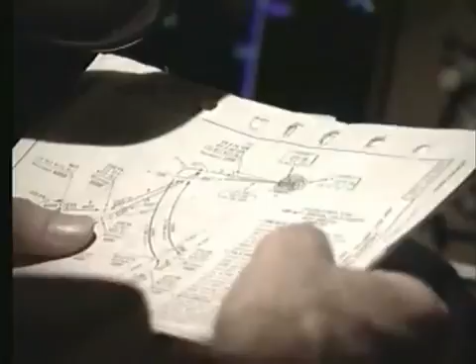As a result, they were cautious and made a thorough preparation and briefing. Their planned approach was going to take them around the DME arc to join finals for runway 08. It was a dark, moonless night and the controller at Apia was reporting scattered cloud over the airfield. As an extra precaution, they briefed for the VOR DME approach to runway 08 in case the ILS was not functioning. In a moment, we'll let the crew help tell you the story as they made their approach for runway 08.

The glide slope capture happened almost immediately after the approach mode was selected. The captain had the aircraft in vertical speed mode to slow down and was concerned that the aircraft seemed to accelerate as it pitched down with the glide slope capture. As we came around the arc, everything was fine. But suddenly, at glide slope intercept, everything became rushed. The aircraft pitched down, but now the aircraft was a lot faster than you should be as you commenced the descent for the ILS. But the ILS indications were all correct, so the captain concentrated on managing the energy problem.

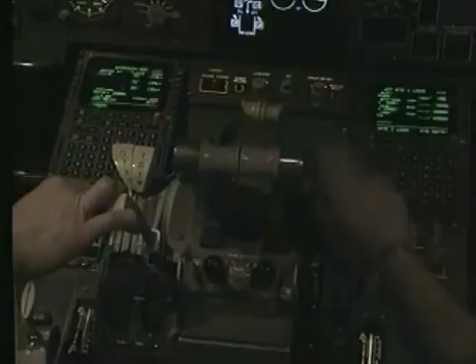I reconciled it by saying tailwind, heavy weight. There were no flags, no warnings of any sort to indicate that there was anything other than an autopilot capture of a valid localizer and a valid glide slope. The first officer did not remember talking to Apia Tower about this time because he was focused on assisting the captain with the management of the aircraft energy problem. We were getting preoccupied with managing the aeroplane and slowing down and configuring.

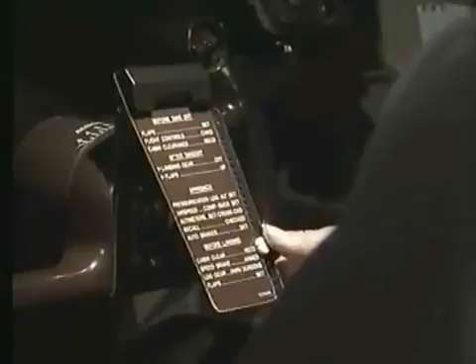At 1,000 feet, the crew had completed the landing checklist. Each started to think again about the unease they had felt when the aircraft had captured the glide slope so quickly. Why were we rushing? Why was the aeroplane going down so quick? Why were we needing to use speed brake? Why were we needing to use the gear? I was heads down managing the aircraft all the way through till the landing checklist was complete.

With the aircraft now set up for landing, they started to revisit their doubts. They were looking for something to confirm that the on-slope glide slope indications were, in fact, correct. I looked up to clarify in my own mind where we were. Something in my mind said things were not right.

All 3 pilots looked up through the forward windscreens, expecting to now see the runway lights in front of them. The captain reported seeing a mishmash of lights and thought that scattered cloud, previously reported by Apia Tower, might be partially obscuring them. The other pilots could not see the runway lights either. Well, when I looked out the windscreen I couldn't see the airfield, and I expected to. I remember looking up through the windscreen and all I could remember seeing is 2 dim red lights. I thought, oh, that's interesting.

Where's the airport? It didn't make any sense to me, so I came back inside and saw that the glide slope and the localizer are both still centred. There are no warning flags, and the 3 autopilots are still engaged. The first officer looked out of his side window and was surprised to see that the lights from the village on the adjacent island were so close.

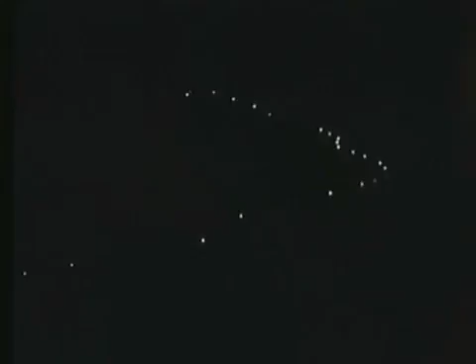He voiced his surprise. Well, shit, those lights are close. At the same time, the captain was doing a DME cross-check, but was unable to make the answer tie up with the aircraft altitude. He decided that there was something seriously wrong with the ILS instrumentation. The third pilot also checked the DME against the altitude.

I did the first DME check, it didn't make sense. What had I done wrong? And suddenly it all clicked that my DME checks were saying we weren't where we were supposed to be, and almost instantaneously all 3 of us said, go around, go around. Go around, go around. The autopilots were disconnected and a missed approach was conducted to a safe altitude using only

the standby instruments. The captain chose to fly to a safe position to assess what should be done next. He had a feeling the aircraft had deceived him and he needed to re-establish his trust in the instrumentation before

returning for another approach. Once we'd levelled off at 4,000 feet, I was very keen for the captain to put the autopilot in, and I prompted him. I was keen for him to offload himself, and in doing so offload all of us a bit so we could ascertain exactly what we were going to do and use the autopilot to help join the arc and fly a second approach.

The first officer called Apia Tower on the radio. We've had a false glide slope capture. Restoring their confidence in the aircraft systems was not easy, and all 3 pilots discussed their situation carefully. Their discussion led them to suspect that the glide slope for runway 08 was giving false information and could not be trusted. They then planned and executed a second approach, using the localizer and ignoring the on-glide path indication.

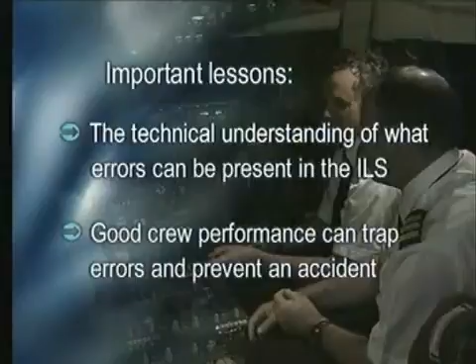The subsequent investigation revealed some important lessons in 2 main areas. The first lesson is the technical understanding of what errors can be present in the ILS. The second lesson is in how good crew performance can trap those errors and prevent an accident. Let's look first at the technical aspects of the investigation, and specifically the ILS ground system.

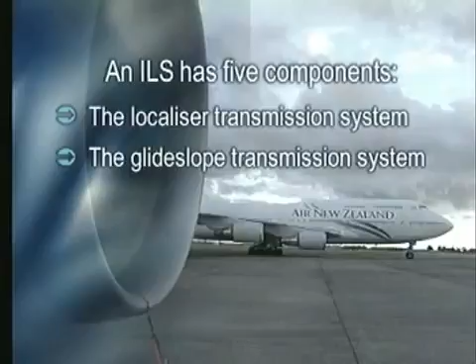A basic ILS system provides horizontal and vertical guidance information to an aircraft. An ILS has 5 distinct components. These are the localizer transmission system, the glide slope transmission system, co-sited distance information from a DME or a marker system, a second standby transmitter, and a remote control and indicator system.

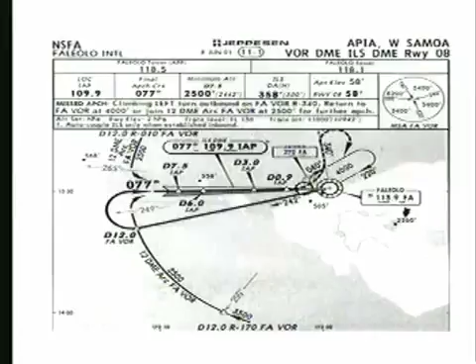The Morse code identifier signal, or ident, is carried on the localizer carrier signal only. The ramifications of this are not widely appreciated. An audible and valid ident is, therefore, only guaranteeing you that the localizer carrier signal is transmitting. It does not ensure that the glide slope is transmitting. If some components of the whole ILS system are not functioning, it is recommended that they should be switched off.

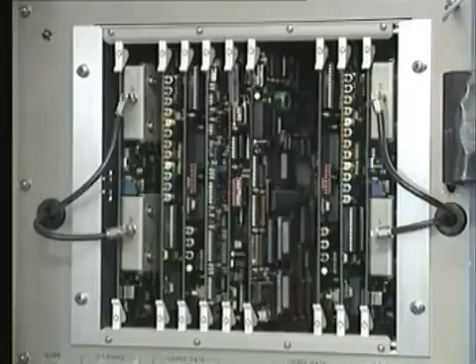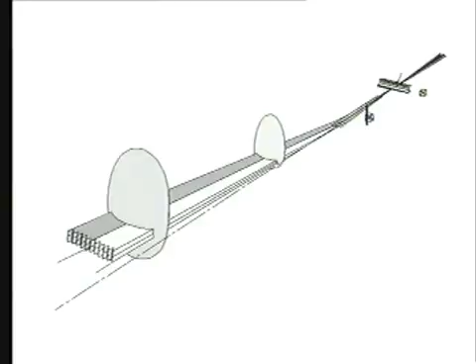2 separate transmitters generate the localizer and glide slope signals. Each transmitter receives signals from a pair of amplifiers. Historically, we've been led to understand that both the electronic localizer and glide slope signals form narrow, tightly focused beams which the aircraft receiver sensed. The actual signal pattern is, as you will see, rather different.

The 2 glide slope amplifiers provide signals to the glide slope transmitter. The transmitter then routes the signals to 2 independent aerials. The 2 aerials that create the total glide path signal are located on a tower near the runway and abeam the touchdown point.

The lower aerial radiates the carrier wave. This carrier is formed by a UHF signal and is modulated or adjusted with 2 other frequencies of 90 Hz and 150 Hz. The resulting signal contains equal amplitude 90 and 150 Hz modulations. This carrier wave on its own does not provide any glide path guidance.

The upper aerial radiates 90 Hz and 150 Hz modulations only. These signals are transmitted in a specific phase relationship, with the 90 Hz and 150 Hz signals being transmitted by the lower aerial. As a result, a complex interference pattern is formed, effectively creating upper and lower side lobes as shown in the diagram. The null between the 90 and 150 Hz side lobes define the glide slope.

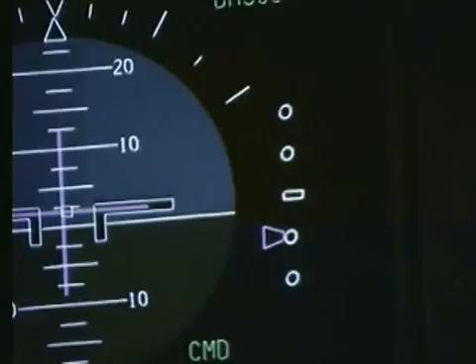These patterns are designed so that if the aircraft is below the desired 3-degree glide path, it will sense a predominance of 150 Hz. If it is on the desired glide slope, it will sense the null between the 90 and 150 Hz signals, so that the flight instruments will show on slope. If it is above the desired 3-degree glide path, it will sense a predominance of 90 Hz. This is the normal operation of the glide slope transmitter.

Let's look at the abnormal ILS glide slope transmission that occurred on the night. The glide slope side lobe amplifier was not operating, so the aircraft only received the glide slope carrier wave. Because the carrier signal has equal amplitude 90 and 150 Hz modulations, this signal was electronically interpreted as being on glide slope. But the ILS system is supposed to protect against this type of malfunction. So what are the measures that should prevent a faulty glide slope transmission?

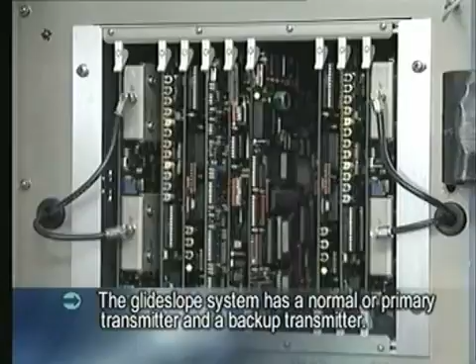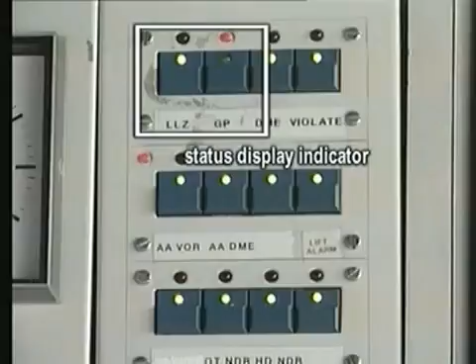The glide slope system has a normal or primary transmitter and a backup transmitter. A sensor on the radiation field monitors the signal integrity. And there is also a status indicator and alarm in the tower. For a Category 1 ILS, ICAO rules specify that an out-of-tolerance transmission shall not exceed 6 seconds under any circumstance. If the primary transmitter develops a fault, the system should automatically transfer to the backup transmitter. If the changeover does not occur, or the backup transmitter is also faulty, the system is automatically shut down and the alarm in the tower is sounded.

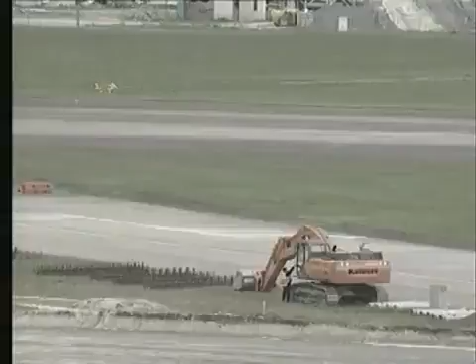However, the runway at Apia was being extended and the cable was cut between most of the navigation aids and the status display in the tower. This resulted in the NOTAM stating that various navigation aids, including the ILS, were unmonitored.

But unfortunately there's more. For maintenance purposes, parts of the ILS system can be shut down in a bypass mode to facilitate calibration. On that night in July 2000, the glide slope transmitter with the inoperative side lobe amplifier was left switched to the maintenance mode via a bypass switch so that the system could not transfer automatically to the standby transmitter. As a result, NZ60 only ever received the carrier wave transmission for the glide slope, and so the aircraft always sensed that it was on slope. As the carrier signal was being received, the aircraft instrument glide slope warning flags consequently were removed from view.

Now let's consider what threats exist and what our strategy should be to deal with these threats. There are many possible ILS problems, but we can categorise them into 4 groups: the false glide slope, the false localizer, the erroneous glide slope, and the erroneous localizer. The false glide slope and the false localizer are byproducts of the normal ILS transmission.

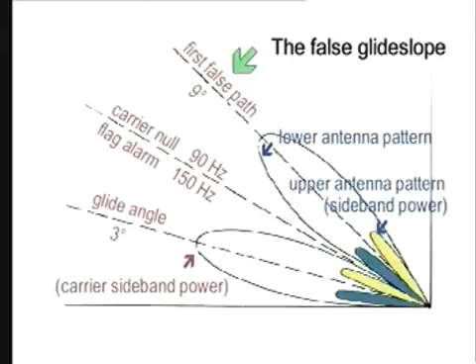For example, the glide slope signal is transmitted with additional lobes above the primary 3-degree lobe. The first one has a 9-degree glide path. If this false glide slope was captured, you would have no flags, show on slope, and have a normal ident, but you would need an extreme rate of descent. The best strategy to detect a false glide slope capture is to intercept the glide slope at the final approach fix to enable a cross-check of altitude against position.

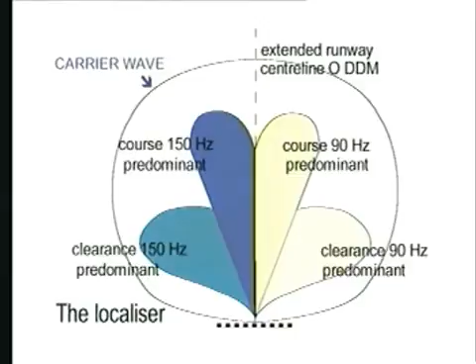A false localizer is caused by a similar phenomena to the false glide slope, but in a lateral path. Remember, these false paths exist as a normal byproduct of correct and valid ILS transmissions. The erroneous glide slope will show that you are on slope regardless of your approach slope or where you intercepted it. You will have no flags, have an on-slope indication and a normal ident. In addition, your sink rate could look quite reasonable.

Even a GPWS would not prevent an accident in this case. The alerts are inhibited if the rate of closure with the ground is within design parameters, and especially if the aircraft is configured for landing, even though the touchdown point might be several kilometres from the runway. However, aircraft fitted with a terrain awareness warning system, for example EGPWS, would receive an alert in this situation. There is one more complication.

Many modern aircraft use flight management computers for lateral and vertical guidance. Once they have been programmed to intercept an ILS, they will fly to their estimated intercept point and execute a pre-programmed pitch-down manoeuvre in the order of 0.05 of a G. This will establish a rate of descent that has no bearing on the actual glide path.

Once this pitch-down has been completed, the aircraft's flight control computers will react to any sensed glide slope deviation. If the glide slope signal is erroneous and indicates on slope, no corrections will be applied to the descent angle. Add this situation to the mindset of pilots that a correctly indicating ILS is valid and accurate, when combined with a distance altitude check at the glide slope capture, and you have a recipe for disaster. The single distance altitude check does not guarantee the subsequent descent path.

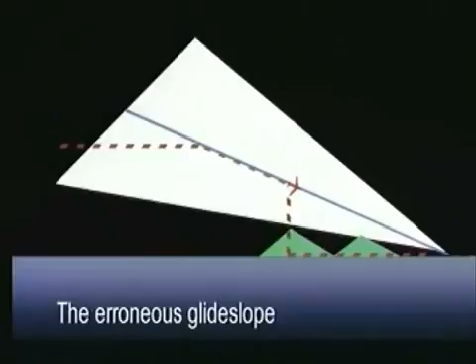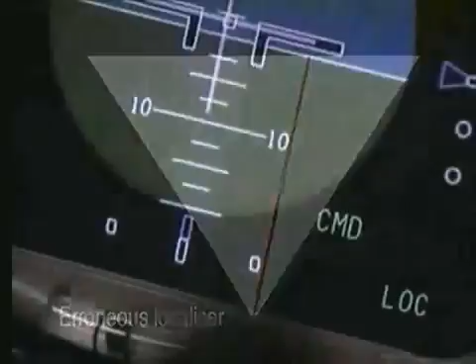Similarly, a single altitude check crossing the outer marker does not guarantee the glide slope is correct. The best strategy to employ is to periodically cross-check the aircraft altitude against distance during the descent. The localizer signal is formed electronically in a similar way to the glide slope signal. The erroneous localizer presents the same problem but in the lateral path as the erroneous glide slope. Again, you would have an on-centre indication, no flags and a normal ident, but the aircraft would not be following the correct path because it would not be getting any lateral deviation information.

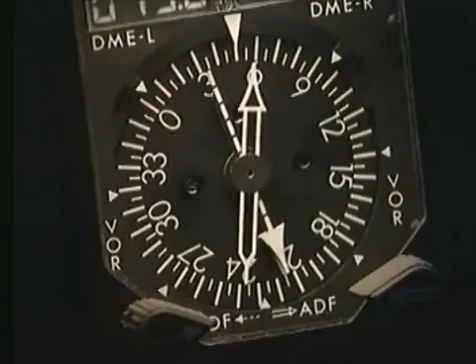The best strategy for this fault is to cross-check the ADF or VOR pointers. They will show any tracking discrepancy if they are selected to the outer marker or a nav aid selected at the field. The investigation also looked at human factors issues, and specifically the crucial strategies which enabled the NZ60 crew to prevent this incident from becoming an accident. These were team building, preparation, vigilance, and trust.

Preparation for this flight was excellent. The crew arrived early to flight planning. They hadn't operated together before, but they reported that a good feeling of teamwork quickly developed due to the relaxed atmosphere which allowed them all to work effectively. The crew's thorough discussions regarding the unmonitored state of the VOR, ILS DME and ILS glide path, and the absence of standby power for the ILS glide path also involved the flight dispatcher. On the way to the aircraft, one of the first officers bought coffee for the flight crew and the ISD. All these team-building elements meant that this crew was functioning very well long before the event at Apia.

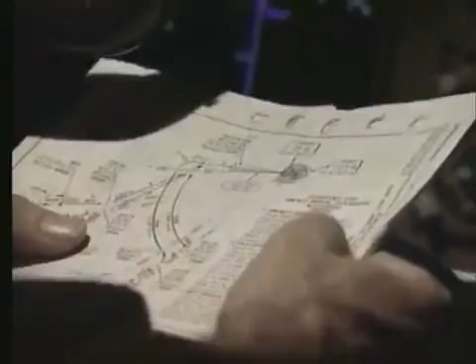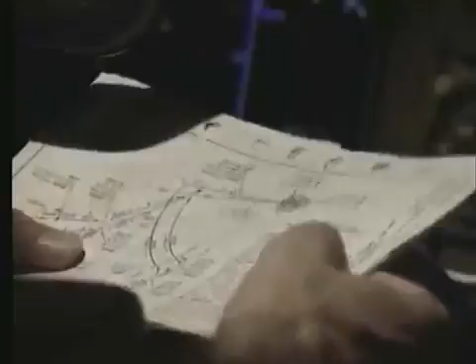Vigilance is what saved this flight. The pilots planned their descent and approach carefully, and the approach briefing was very thorough. During the initial stage of the approach, they confirmed the planned FMC descent profile was being flown on the DME arc by using the 1 in 60 rule. Because it was NOTAM'd unmonitored, the third pilot continuously monitored the ILS ident for any unseen eventualities. They also pre-briefed for the alternative VOR DME approach. The crew were watching and waiting, but when the clues arrived, they needed to decide which information was correct before deciding what course of action was appropriate.

Probably the best qualified to comment on this process is the head investigator into this event, Mr. Dave Stobie. Early on in the investigation, it was obvious that this crew were cautious, diligent and well prepared for the approach. They were aware that they needed to cross-check their various pieces of information, but they had a normal mindset for pilots conducting an ILS. Pilots tend to trust the most precise information. For example, they trust a VOR more than an NDB. They also trust an ILS more than any other approach aid because it allows high precision approaches.

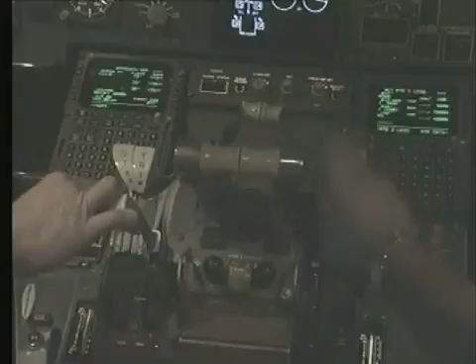So when things didn't feel quite right during the approach, they naturally accepted the most precise information they had, which was the ILS, especially in the absence of any warning flags. That mindset was difficult to break. The combination of a high workload managing the aircraft energy and the trust in the ILS system that they had all been conditioned to have made it difficult for them to perceive the glide path error. When the captain looked up and didn't see the runway lights, he made the mental picture fit by assuming there was weather in front of him.

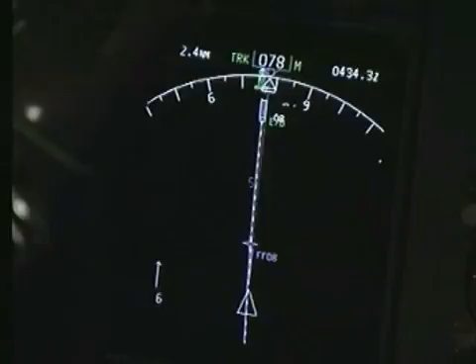When they saw a descent of just over 1,000 feet per minute, the crew again made the mental picture fit by assuming the tailwind and heavy weight were the cause of the higher rate of descent. They were presented with normal centerline and glide slope indications on all their instruments. The autopilot had accepted the localizer and glide path guidance signals. There were no immediate clues available to warn them that the information being portrayed on the instruments was, in fact, wrong.

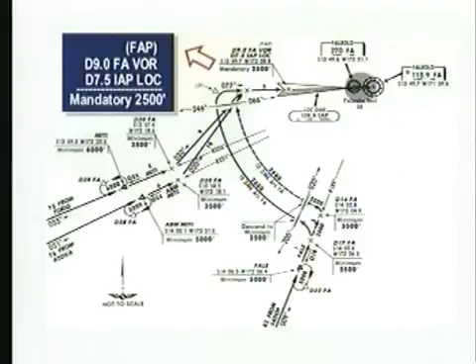The autopilots interrogated all data and found no anomalies with the status of the ILS information and therefore went to Land 3 auto land mode. The Faleolo VOR DME was the only DME not subject to a NOTAM. With the crew using this DME, the conflict of DME distance against the aircraft altitude took some seconds to resolve.

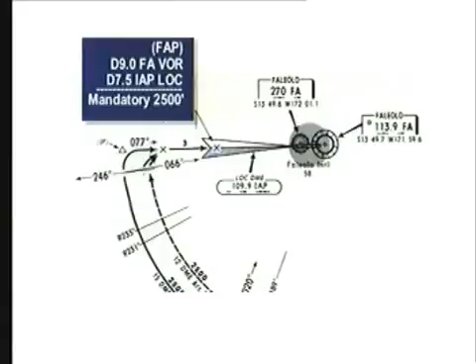The Faleolo VOR DME is 1.5 miles down the runway from the threshold of runway 08, and this required an adjustment of 450 feet to the 300 feet per mile rule to check the distance against required altitude. In the face of a centred glide slope indication, the fact that the distance was anomalous against the actual altitude, combined with the high level of trust pilots all have for the accuracy of the ILS, would have created a potential mental question of what did I do wrong? What error did I make in my calculation?

Although they didn't understand precisely what was wrong, the conflict generated for each of them from the distance altitude anomaly and the apparent closeness of the lights on the adjacent island caused them each to break their mindset of the ILS being correct and make a safe decision to go around, establish the aircraft clear of terrain and above safety height, and then examine their options.

When pilots cross-check information, they do so because they are aware of possible errors. Over the years, we have learnt about many of the technical errors which occur, and we are continually improving our understanding of human error. It's easy to accept the most compelling information, in this case the ILS. This is normal human nature. What this event has taught us, yet again, is that we must remain vigilant and always be careful to validate all the information we are presented with.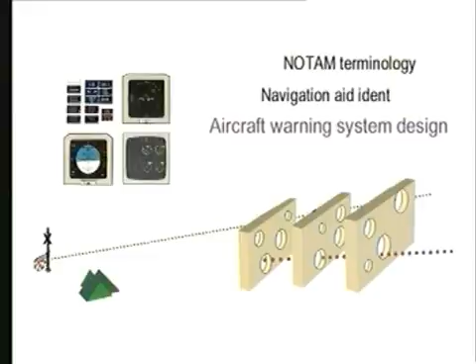The fourth defence was breached when the glide slope intercept check was not completed. The fifth defence, the warning available from a ground proximity warning system, was breached because the aircraft was correctly configured to land, which met all the requirements of the GPWS system.

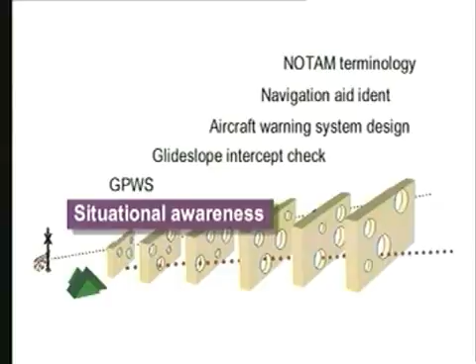The sixth defence held. The crew's situational awareness involving the unease generated at the glide slope capture, the increased workload to configure the aircraft, the proximity of the lights on the island, and reinforced by the conflict between the aircraft altitude and DME distance, caused them to execute a go-around and protect the safety of the aircraft.

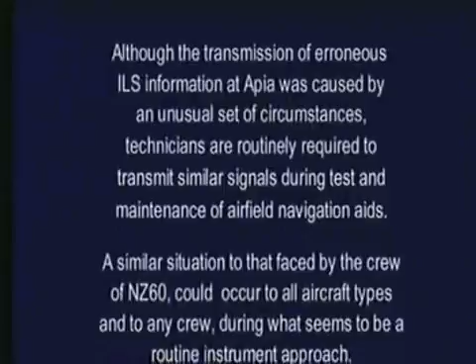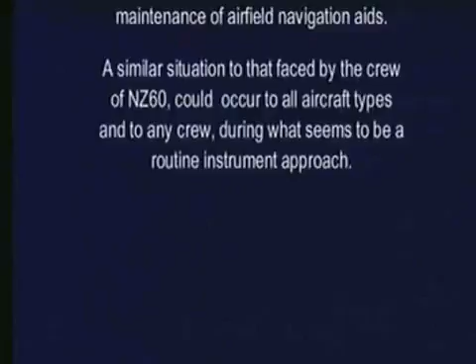Although the transmission of erroneous ILS information at Apia was caused by an unusual set of circumstances, technicians are routinely required to transmit similar signals during test and maintenance of airfield navigation aids. A similar situation to that faced by the crew of NZ60 could occur to all aircraft types and to any crew during what seems to be a routine instrument approach.